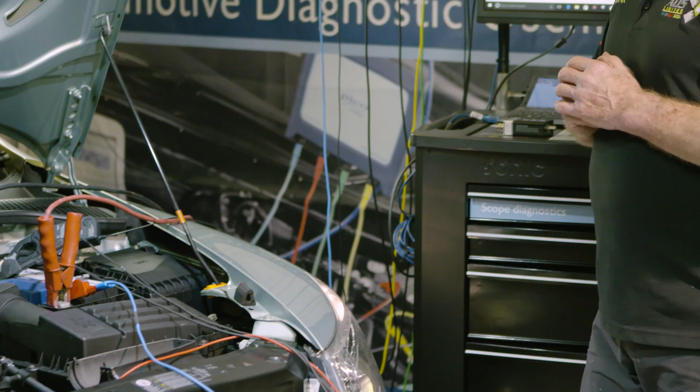We're still connected to the vehicle battery, measuring voltage, potential difference across the battery during compression, which is what the Pico diagnostics platform is using, because that was the only connection we had. I'm going to complement the voltage measurement with current, and you'll notice we've connected the second channel, the red channel, with a current clamp over the battery negative lead. I've deliberately set the polarity of this device so the current appears to be taken out of the battery, something I feel quite passionate about, because I'm using this as consumption from the battery by the consumer, the starter motor. And of course, if the engine were to run, the alternator would then show a positive current flow, not a negative flow out of the battery.

So how are we going to set this up? 20 volts would be the most appropriate setting for channel A. Channel B, I'm going to choose 1 volt. Some of you will have seen me do this before, for a very simple reason. It's a very simple view of how to interpret current using voltage. The sensitivity or attenuation of the current clamp is every millivolt is 1 amp. There are 1,000 millivolts in 1 volt. So by setting 1 volt, I'm establishing a 1,000 amp range in both directions.

When I conduct the test, you'll see that aesthetically it looks right, and the comparison of both voltage and current is much easier to understand. But we need a longer time base, so I'm going to set a 2-second time base, which gives us a sweep time across the screen of 20 seconds - long enough for me to go and conduct the test. You can see the test running live. We'll come back and then do the analysis.

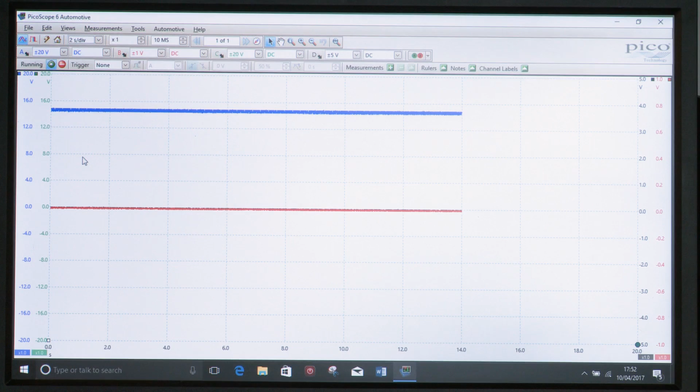Roughly a 10-second crank duration.

Now, in terms of assessment, I've got quite a high sample rate, 10 megasamples, which gives me the opportunity when I zoom in, dividing the amount of data that's stored in the buffer - which is how the display works: acquisition, storage, display, the 3 functions of an oscilloscope. We can extract the data out of the buffer with plenty of detail because I've got lots of data stored, so you get a very nice, accurate image.

The noise on the signal is due to the battery support, which I've kept connected to the vehicle because we do a lot of cranking tests. I don't want to diminish the results of the test with a decaying battery, so I've supported the battery with a Fronius battery support tool.

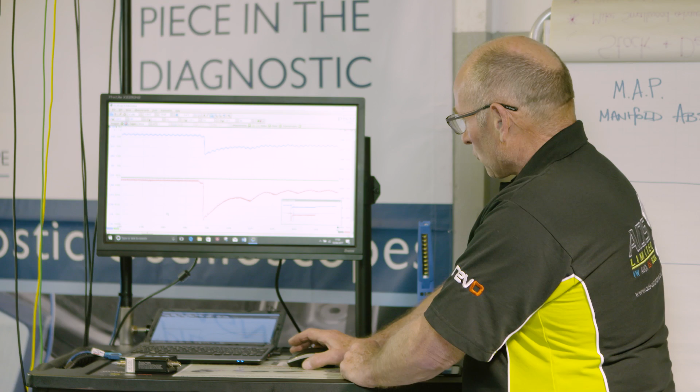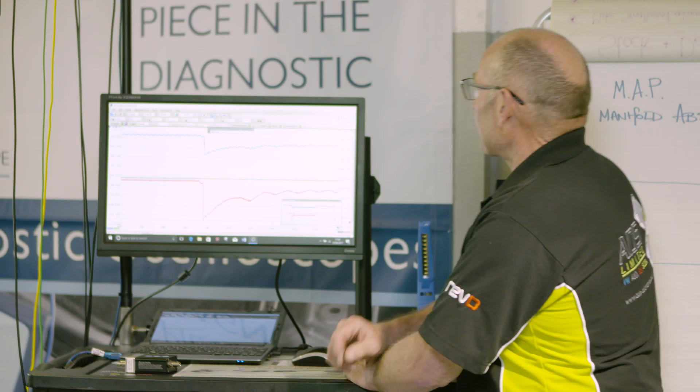Now let me just explain my take on this current measurement. If we use a cursor and measure the peak current draw, that's represented as 695 millivolts, which is 695 amps. It is that simple - just move the decimal point 3 places. So I'm happy with that.

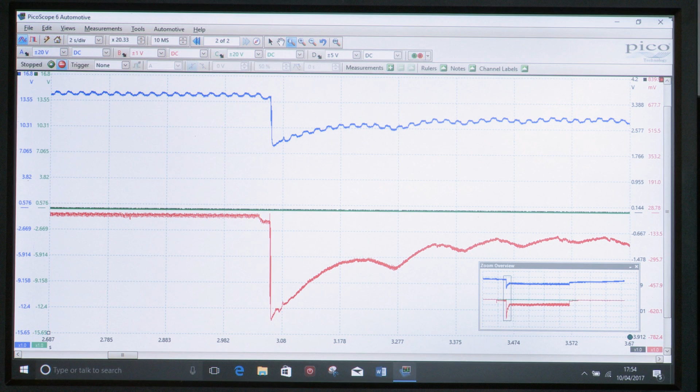I hope you are too. However, what we do want to look at is the results of this test over a period when it's stable. So I'm going to choose - now, of course, the last test we did looked at the voltage analysis, so let's take a look at that first. Voltage differential - and you can see there is a differential in voltage during the cranking process.

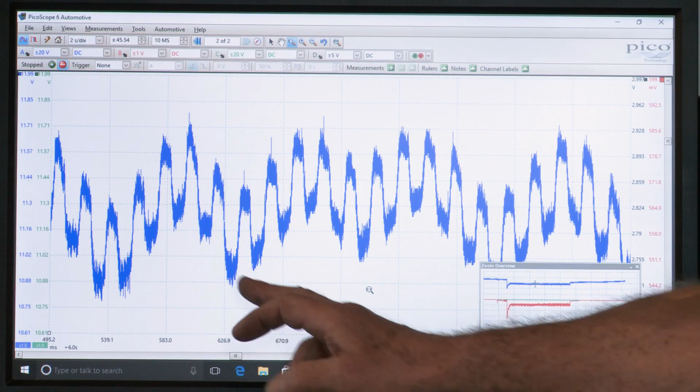And we can see the pattern, it isn't even. Now I find that a little difficult to establish. Good compressions would suggest that these are good compressions and these potentially are poor compressions.

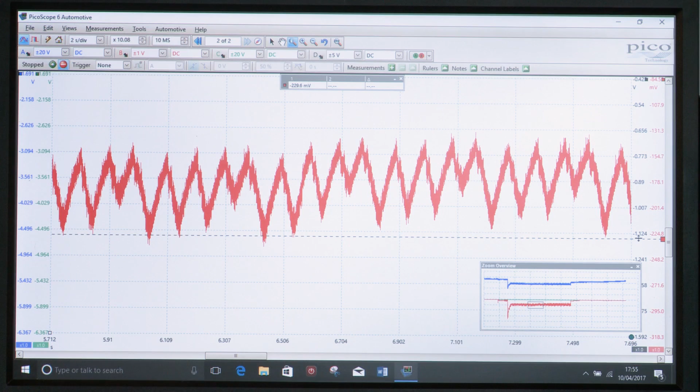Okay, let's look at it from the current point of view. Now let's mark the good compression events, obviously the negative events. So I would say that we have 2 healthy compression events. That is a little lacking, and this is seriously lacking, so that is the problem event.

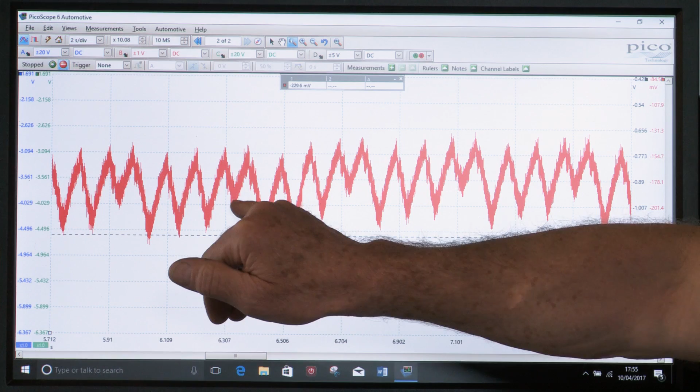So we're pulling during this stable cranking event, in other words, when the current's recovered, the engine's now revolving at around 250, 260 RPM. The amount of current consumption by the starter has recovered somewhat, and we're pulling just under 230 amps of current. However, this event here, which is obviously a weaker event,

is only consuming - now we could also do a little bit of filtering here, guys - 198, let's call it 200 millivolts. So there's a 31 millivolt or 31 amp difference in the work rate on that cylinder. And you can see some cylinders are even worse than that. So that's how the relative compression test is done, but you can do it using the scope in real time.

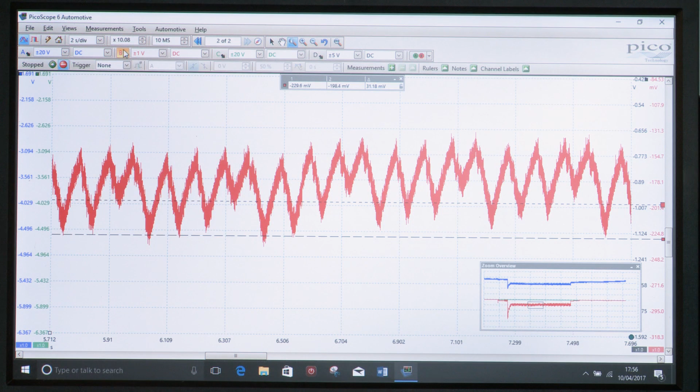Now, if we choose to filter, we might get a little bit more of an accurate assessment. Let's filter a little bit more, let's see if we can improve this. Be careful with filtering, guys, because what we don't want to do is use very high sample rates with a lot of noise in the signal - I don't want to filter out detail.

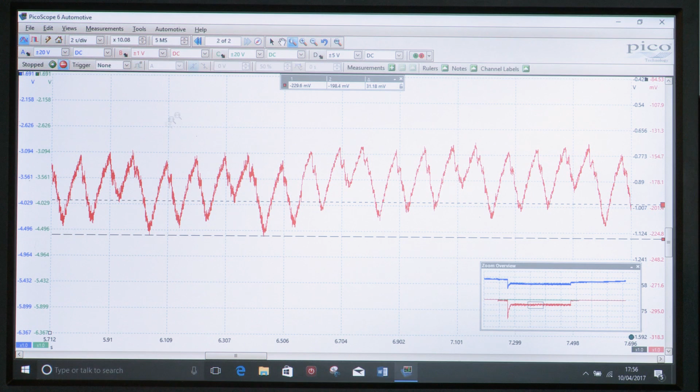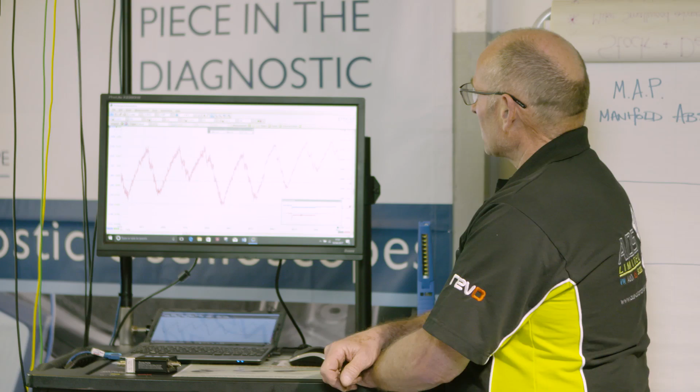So I'm going to hold at that point. I think my assessment is reasonably accurate. If we look at the performance between a good compression and a poor compression, it's 27 millivolts, 27 amps difference between the two, which is around 10% of the work rate done by the battery.

So we can see there is a mechanical problem with this engine. Now, you may say, well, how do I know it's not a problem with the starter motor? Well, that's down to a different frequency. The rotation speed of the starter motor is much quicker than that of the engine, and the performance of the starter motor armature is represented in these events here with very high sample rates.

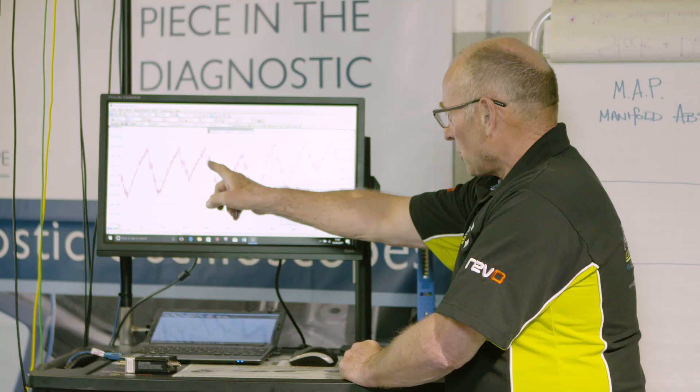So we can actually look at the performance of - if there was a problem with the windings in the starter motor, we're going to see there are some slight differences here of the current consumption from the starter motor, but not affecting compression, which are these events. So that's

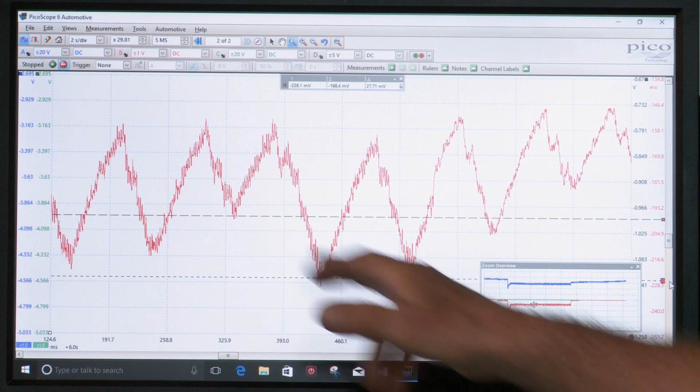my take on a variation of the Pico diagnostic platform. We can do it, and I often do this test with the scope. I think it has a little bit more detail in it. We can measure the difference in terms of current draw from the starter motor with a poor compression. So that's the first basic test.

I'm quite happy with the results of that test. I know there's a problem with the engine. Let's now try and develop a means of proving which cylinder the problem is on and potentially what that problem can be. Now, to do this, what I'm going to do is do a compression test while the engine's running. Now that means obviously that one cylinder will not have a spark plug in it.

However, we're not really interested in the spark and the fueling. We're interested in the mechanical efficiency of the engine. So we're going to be doing a compression test with the WPS in cylinder 1 in real time, engine running, not cranking. You're going to see some very interesting results.